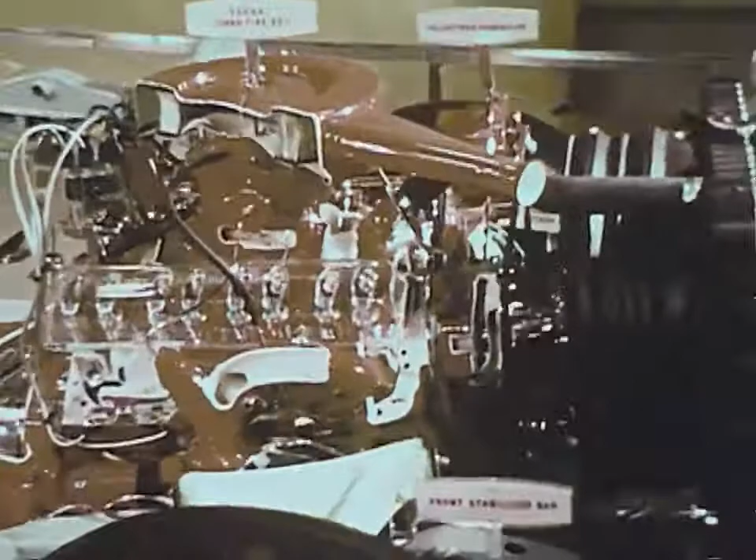Gasoline and air mixed together form an explosive mixture. The basic job of the engine is to convert this explosive energy into motion. To contain the explosion, the engine uses a cylinder and, fitting snugly within the cylinder, a piston that slides up and down.

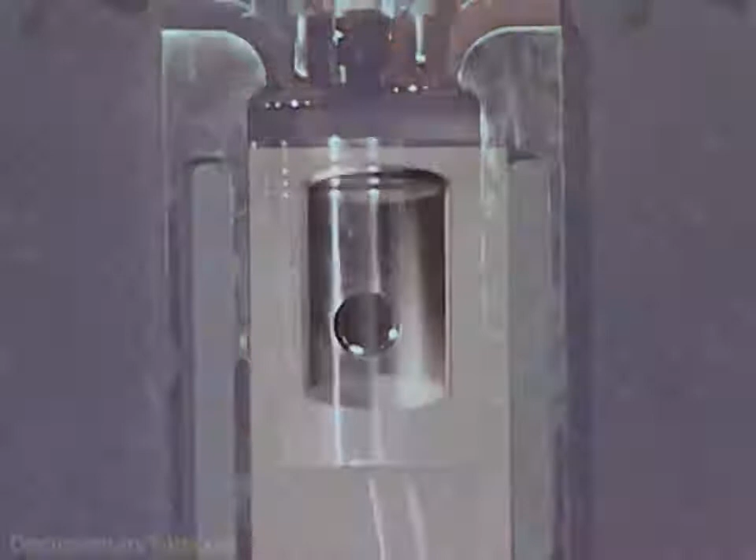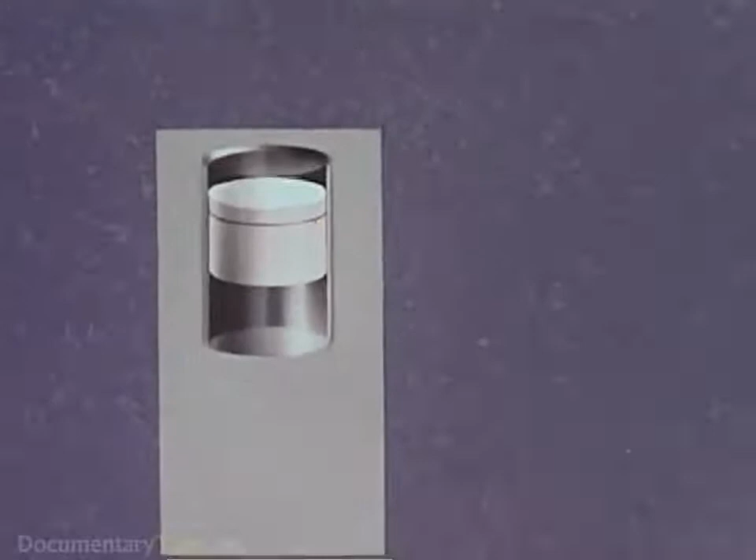Inside the cylinder, an electric spark ignites the compressed gasoline and air, and the hot gases from the explosion push the piston downward. The piston rod is connected to a crankshaft, which converts the up and down motion into rotary motion. The crankshaft then drives the rear wheels through various machinery, which we'll see later.

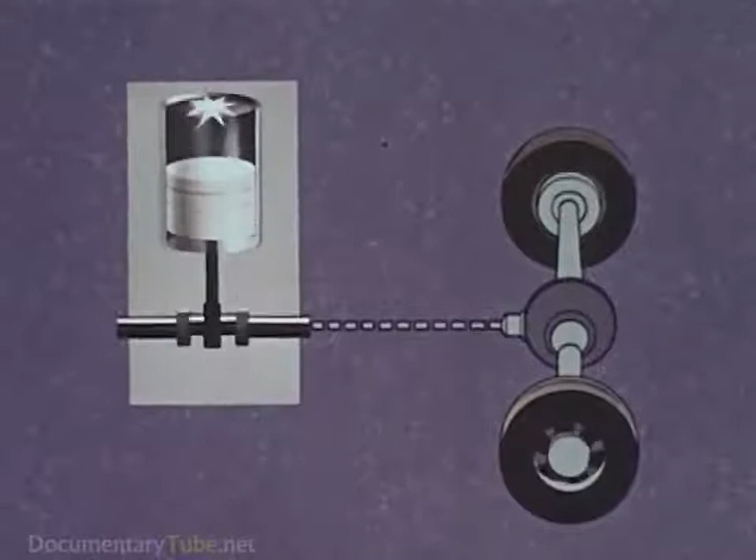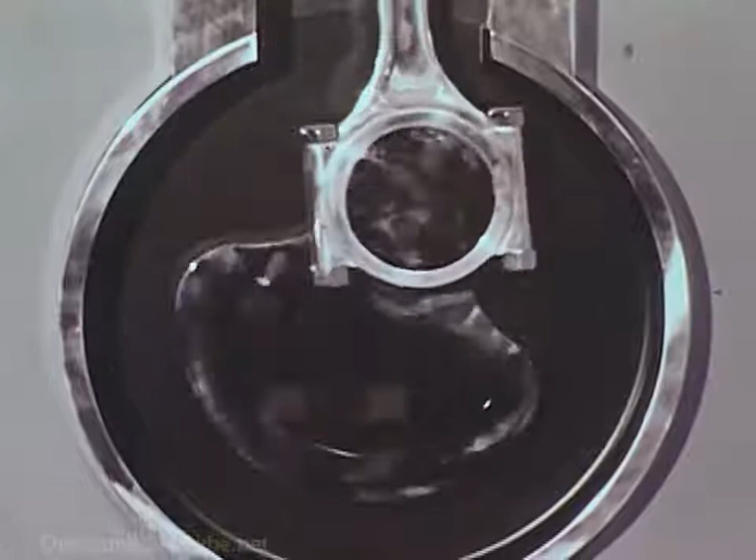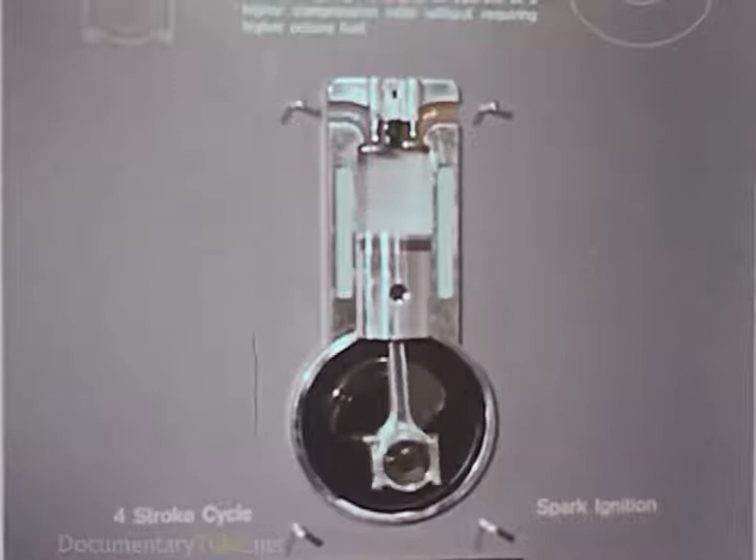Here is a different perspective on how the piston drives the crankshaft through the connecting rod. At the top of the cylinder are the valves, which let in the gasoline and air mixture. For increased power and smoothness, modern auto engines have a number of cylinders driving one crankshaft.

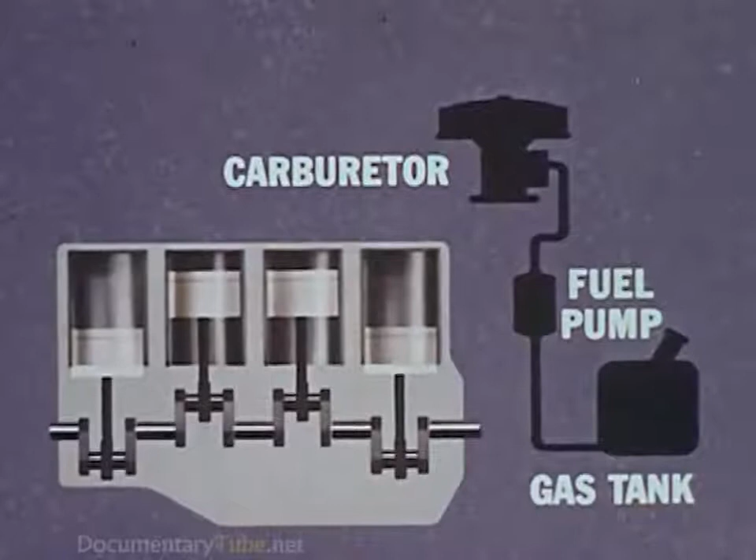Gasoline from the tank is pumped by the fuel pump to the engine's carburetor through the fuel lines. The carburetor mixes the gasoline with air to form the explosive mixture that drives the pistons.

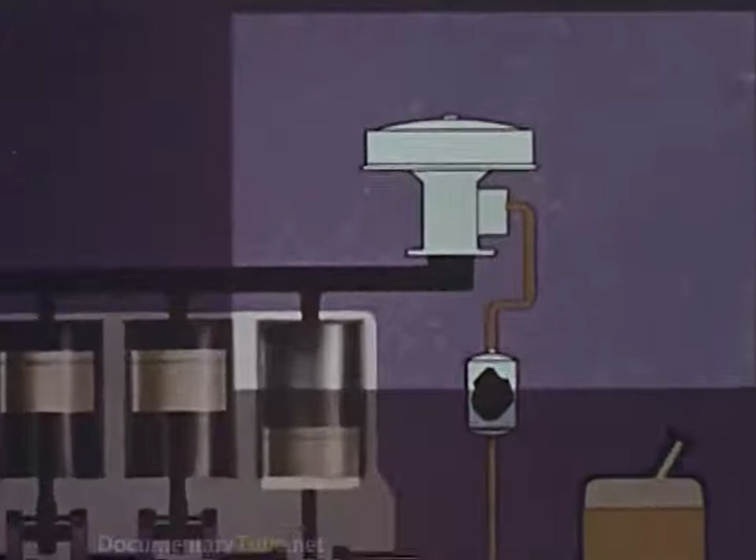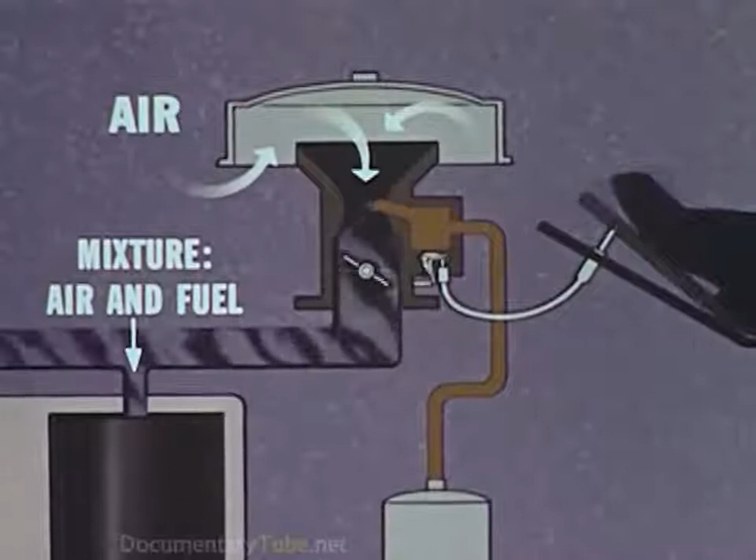Here's a closer view of the carburetor. A linkage connects the accelerator pedal with a valve in the carburetor. Stepping on the gas opens this valve wider, increasing the gas flow and speeding up the engine. Easing off on the pedal reduces the flow and the engine slows down.

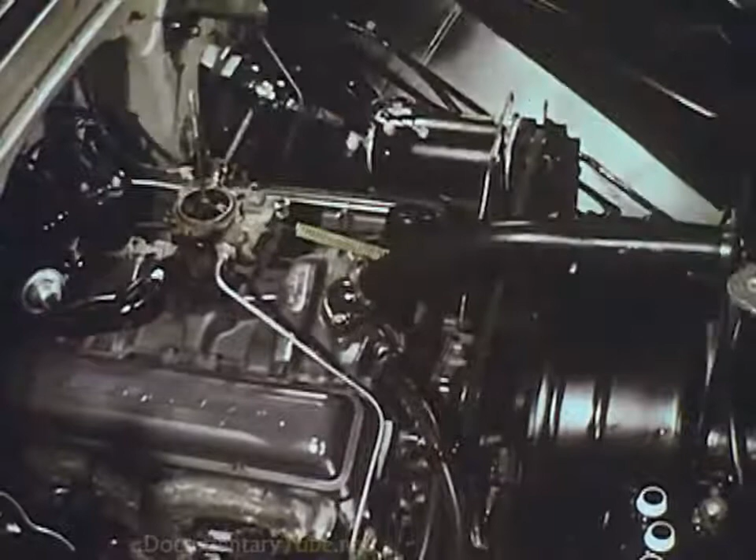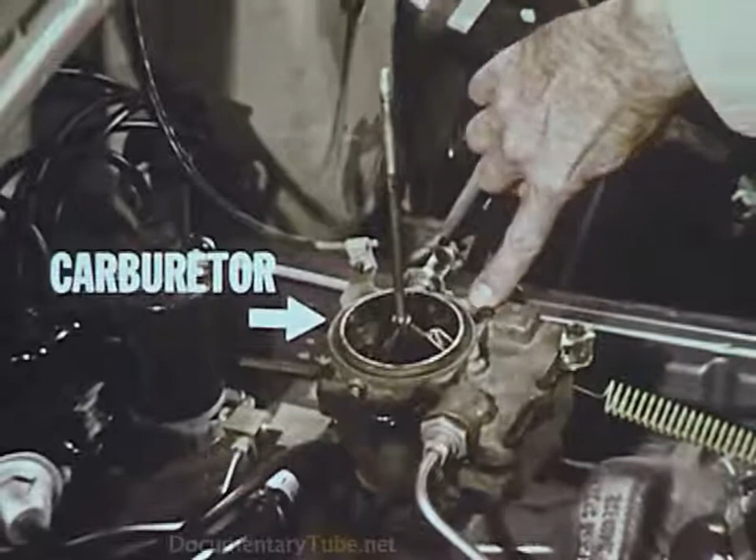Here on an actual engine are the counterparts of the fuel system just diagrammed. The fuel pump, the fuel line from pump to carburetor, and the carburetor itself with its air cleaner removed. Here is the linkage connecting the carburetor to the accelerator pedal.

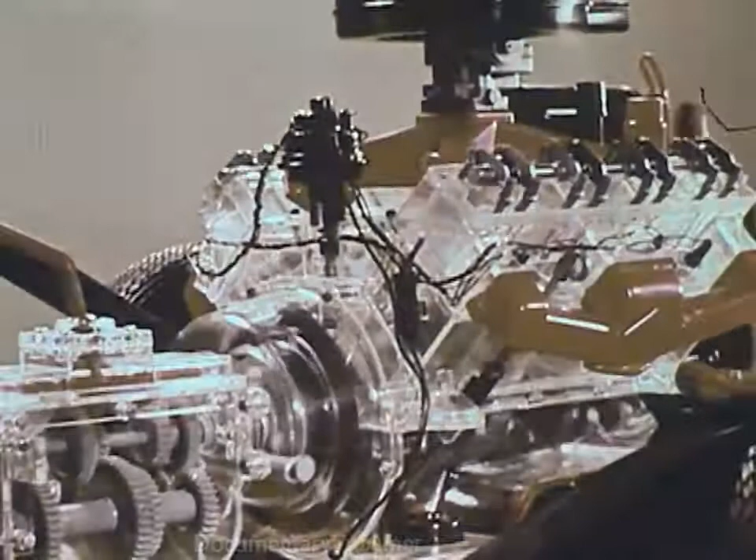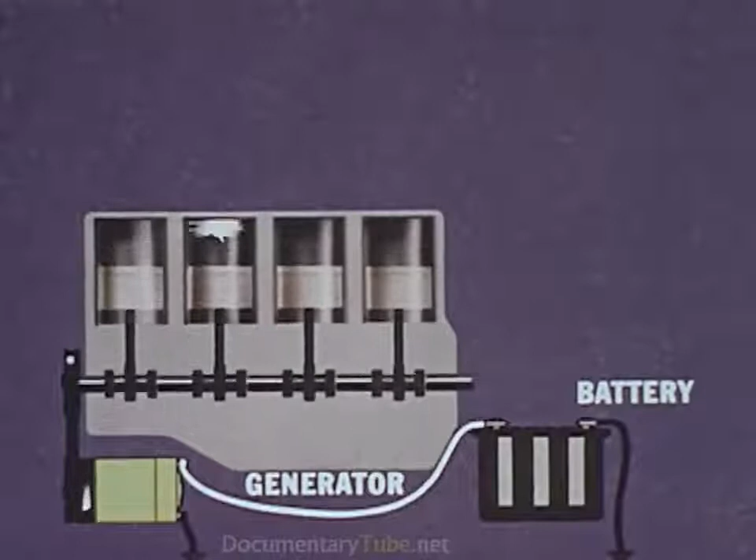The engine's electrical system supplies the spark that fires the fuel mixture. As the engine rotates, it drives a generator which keeps the car's battery charged. The battery supplies electricity to the coil, which boosts the current to a voltage high enough to produce a spark, and then sends it through the distributor to the spark plugs located in the cylinders.

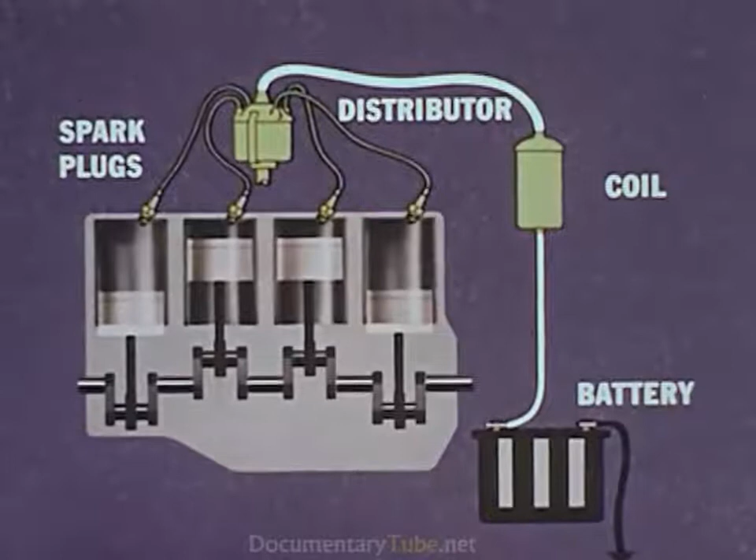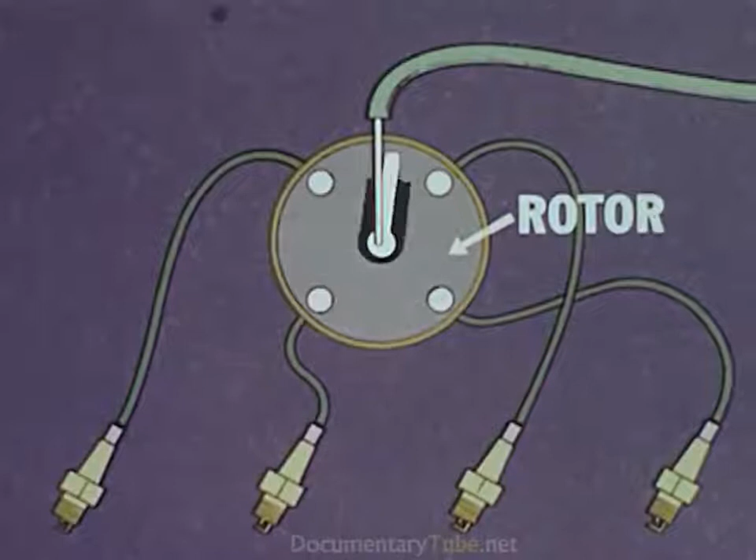The distributor distributes electrical current to the proper spark plug at the proper time. Inside the distributor is a rotor, which as it turns touches a series of contacts, one of which is wired to each spark plug. The points open and close as the rotor turns, interrupting the current to produce the fuel-igniting spark.

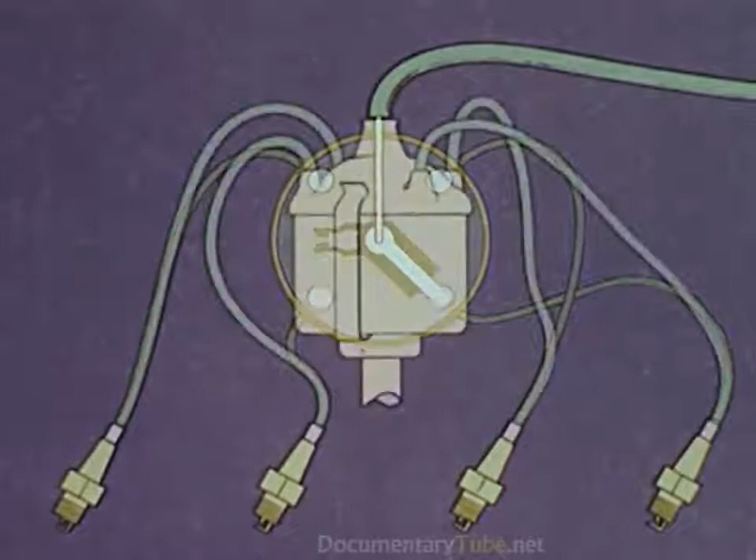Here again are the major parts of the engine's electrical system: the generator, the battery, the booster coil, distributor, and spark plugs. Now looking at an actual engine, here is the generator and the battery.

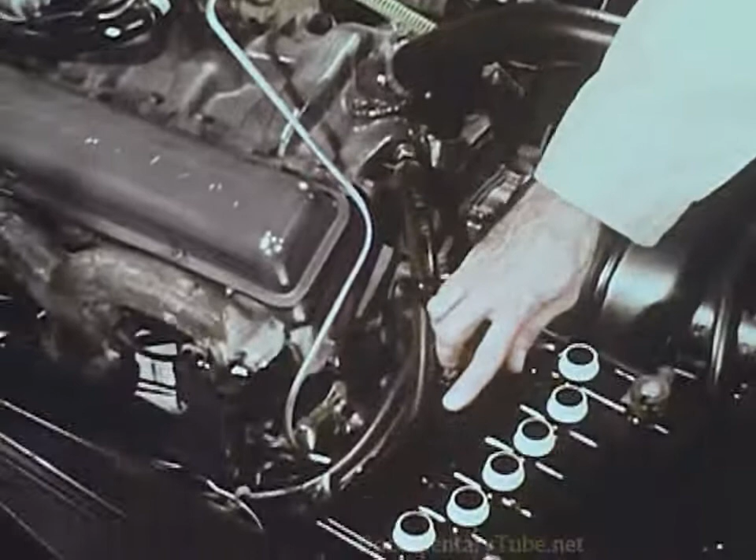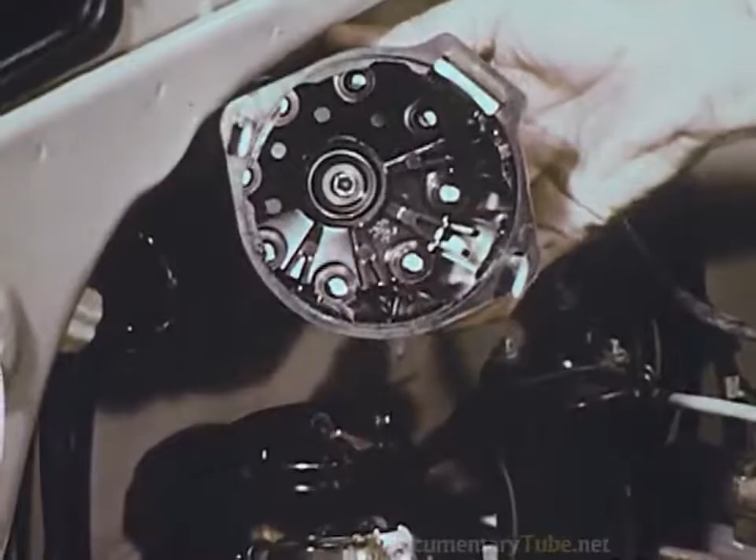Together at the rear of the engine are the coil, the distributor cap containing the contacts swept by the rotor itself, and the points, which sometimes need adjustments. And finally, in the cylinder heads, the spark plugs.

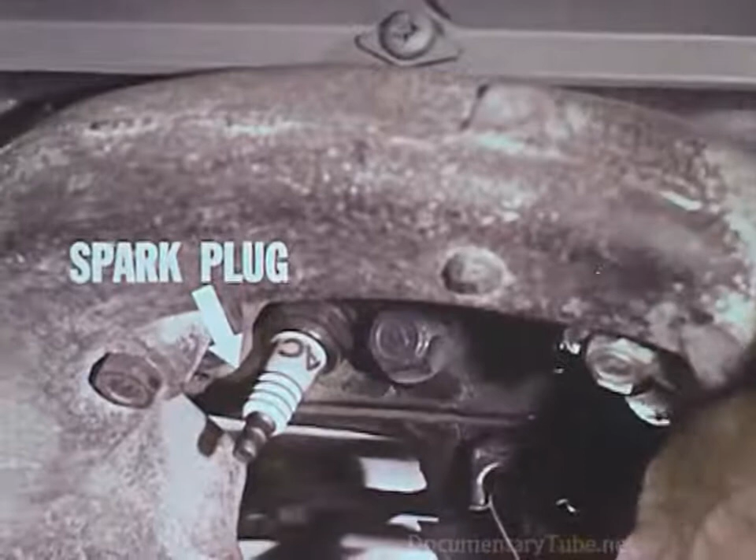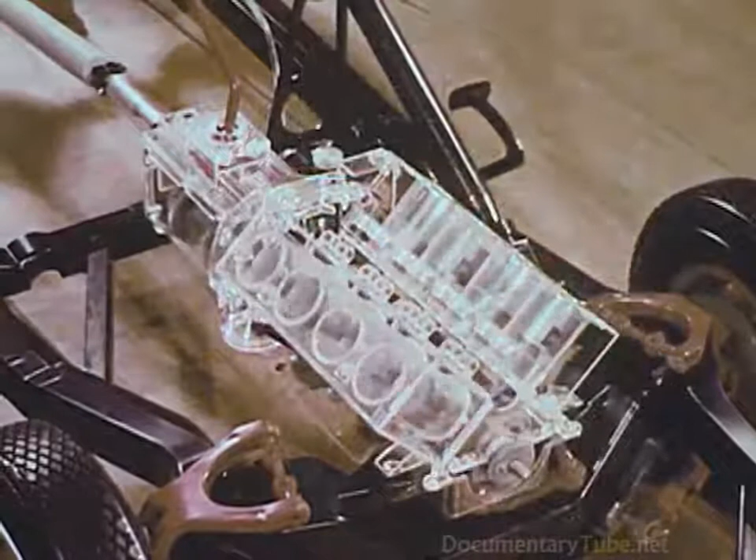The engine on this model chassis contains nearly all the parts found in a working engine. Let's break it down to its fundamentals and then build it up again. Here's the heart of the engine, the cylinders and pistons.

This engine, known as a V8, has two banks of 4 cylinders each, driving a common crankshaft. The camshaft, geared to the crankshaft, lifts and lowers the valves in the cylinders. Now the right and left cylinder heads, containing the valves themselves and the valve lifters.

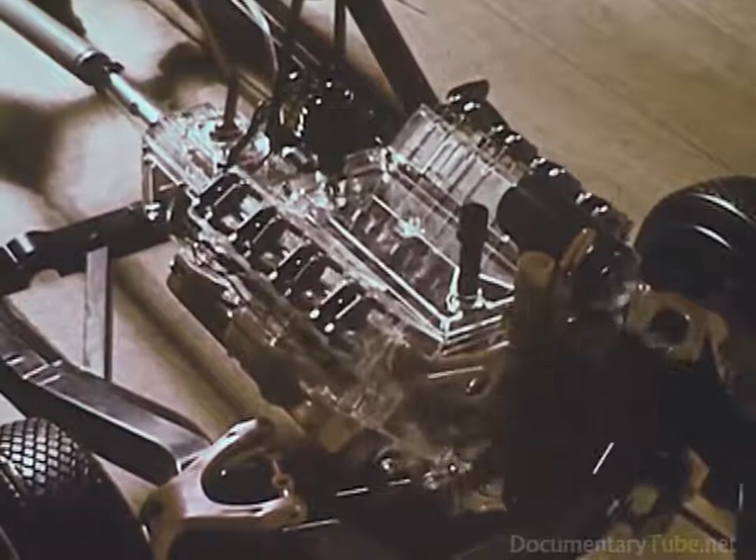The distributor at the rear of the engine is also driven from the camshaft. Now the fan, the generator, and a part of the cooling system. Here, flashing lights simulate the firing of the spark plugs as the rotor supplies current to each in proper firing order.

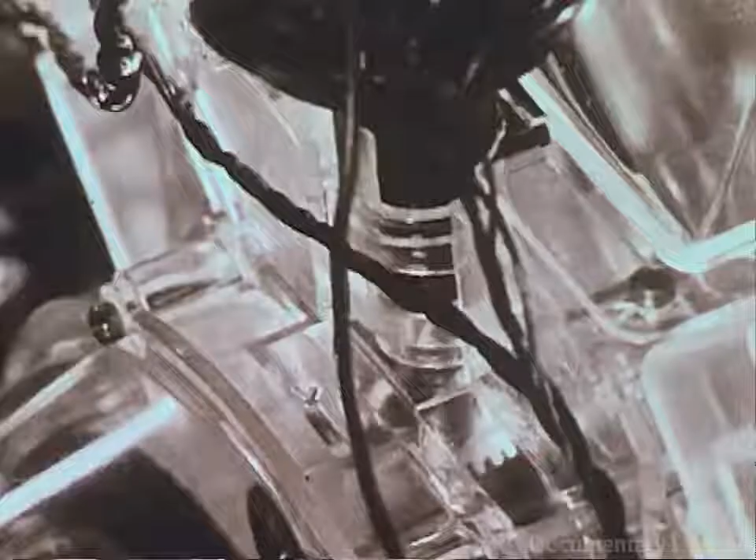Continuing the build-up, here are the carburetor and the manifold. And finally, the air cleaner atop the carburetor. Here is a rear view showing how the pistons drive the crankshaft. And down through the plastic housing, we can see the gearing connecting the camshaft to the distributor.

4, 6, and 8-cylinder engines are standard today. This V8 configuration is very popular for its smoothness and power.